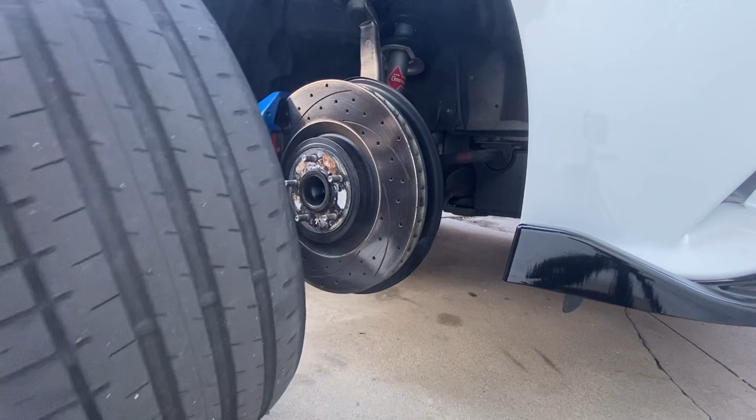What I'm going to show you right here is the inner tire wear that all Lexus have. People think that this is a problem, but it's not. It's the way the car is designed. As you can see right here, the tires are damaged. Not completely, but it's damaged already.

So I purchased these tires like a year and a half ago, and at the same time I purchased the FIGS Engineering bushing, and there is another brand they call RR Racing. So on both of them, they promise you that as soon as you install that product, it's gonna fix the inner tire wear. But this is the proof that it's not. They don't solve anything. So right now I'm gonna show you the FIGS Engineering.

So I installed those like a year and a half ago, and when you install this product, the handling, the feeling on the steering wheel when you're cornering, there is a big difference. It feels way better. It's really nice. I don't complain about that. But that they're gonna resolve the inner tire wear, that's false.

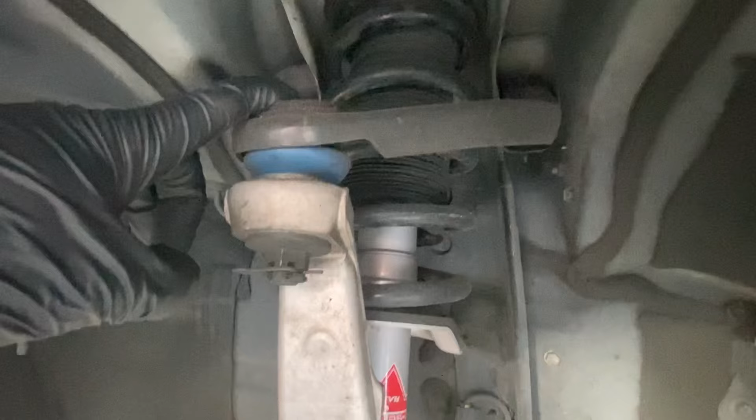So what you need to buy is the adjustable upper control arm to fix the problem. So that is the thing that I'm gonna show you right now, how to install it. Still you need to take the car to do alignment, but it's just the closer way to fix the problem so your tires can last longer. So we have negative camber, so we're gonna push it out a little bit, and I will show you right now how to do it.

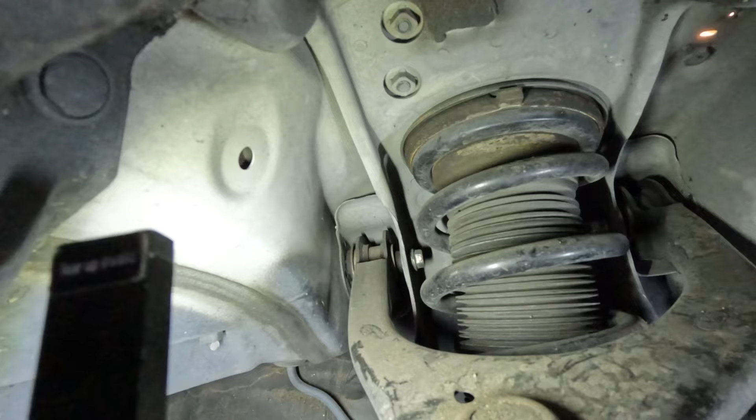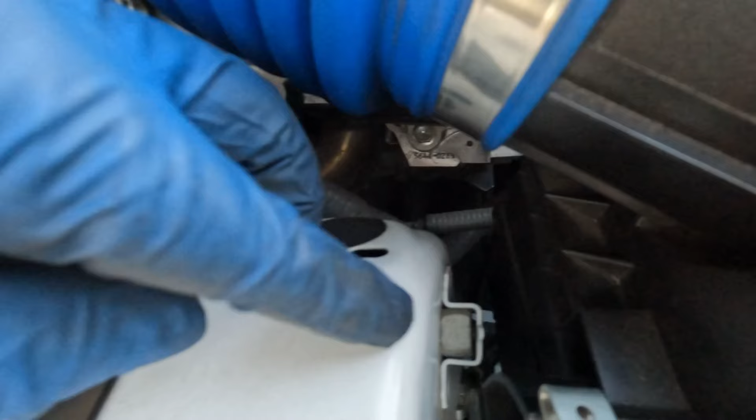So the first thing we're gonna do is remove this and the bolt. This is 17 millimeter, and inside over there is 14, but don't worry, because the other nut on the other side will be right here. So it's holding it right there, so you don't need to do anything. So now I'm gonna come back over here. I'm gonna work on this one right now. So I'm gonna remove this one. Again, 17. You can use an impact gun or whatever you have, but it's not that tight.

So now this one, we're gonna leave it that loose, and we're gonna hit it with a hammer right here. You can use something here to press, but since this one is still in good condition, from the video I did previously, I don't want to damage it. So what I'm going to do is just hit it right here.

Now that it's loose, you need to secure this part, because as soon as you remove this part, this one is completely gonna fall off. So just put a zip tie right here around the spring, just to make sure to hold it. We're gonna leave it there right now. Now we're gonna work on the ones inside. So for this one, you will need this kind of tool, a ratchet. It'll make things easier.

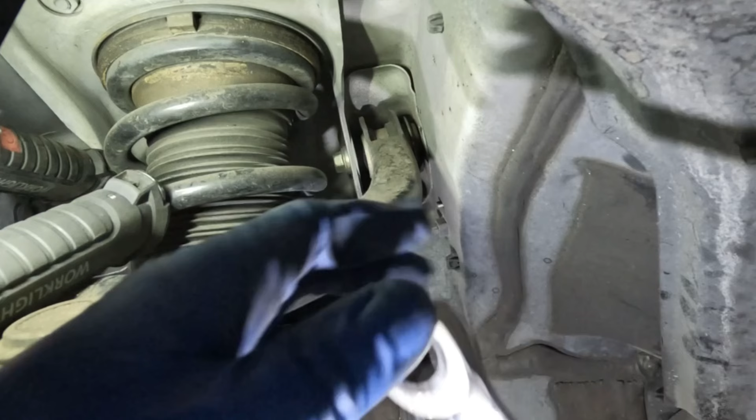You will see that it's loose, but now we go to the other side. I'm gonna leave it like that right now, so you can see I can take it off all the way already. It doesn't matter, but I just want some pressure on the other side. Breaking this loose. You will have to put it in from here. Okay. Now this one. Now we are here. Okay.

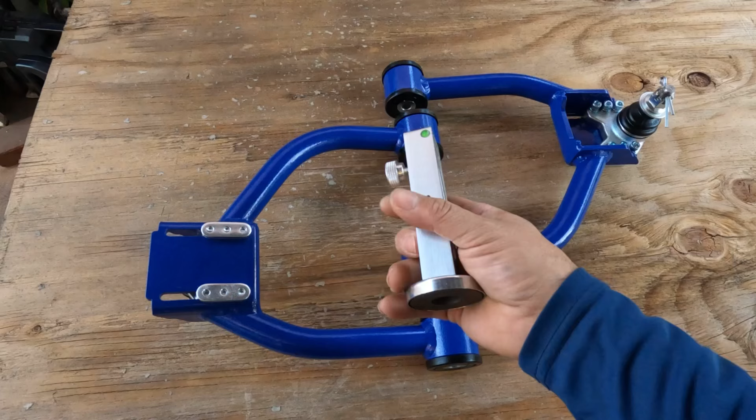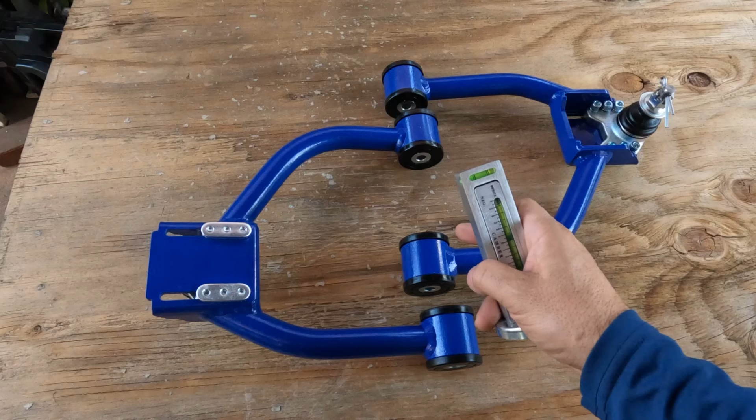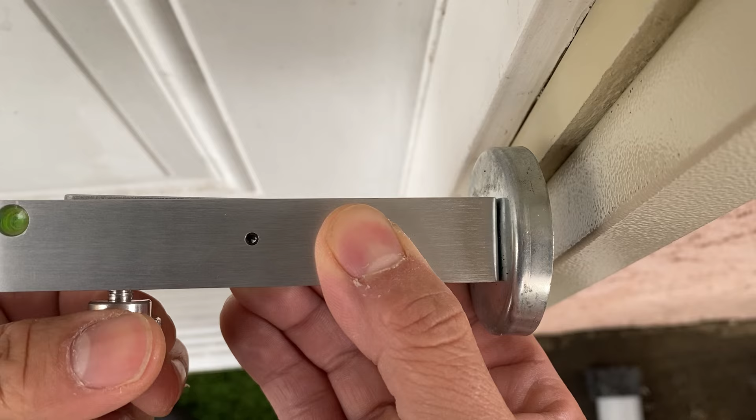This is the tool that you need to measure how many degrees you need to move the camber. So I'm gonna explain an easy way to use it right now, so we can proceed to adjust the camber. This is the tool that you need to know if you have positive or negative camber. It has a knob right here. You can see one side is gonna go up, and if I go to the other side it will be the other one.

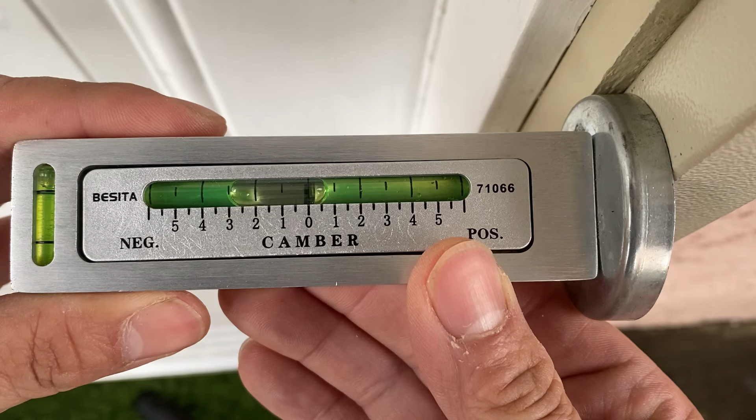So you need to find a flat surface like this one, and you need to leave it exactly on 0. This is something average. It won't be exact. Still, you need to take the car to alignment. So just make sure the bubble is between the 2 positive and the 2 negative. As soon as you have that, that's perfect. So you can start working on your car. So this one we will put on the rotor. Obviously it's a Lexus, so we have negative. So let's see how many degrees we have, and we're gonna work from that.

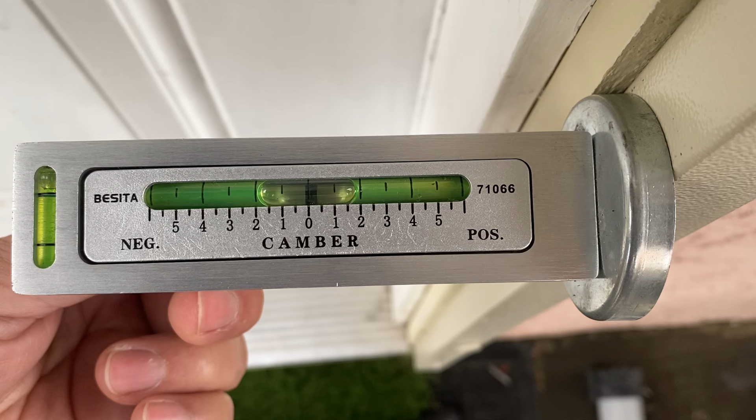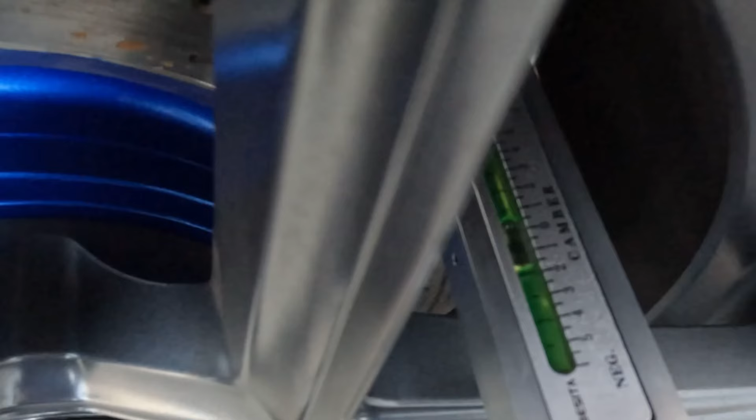So I'm gonna leave it right there, and that is fine. And let's go check the car now. So on the right side, I'm gonna try to see where the bubble is located. So right now it's showing me the edge of the bubble on the negative side is on the number 2, but we center the bubble on 0, so it will be 1. So we have 1 degree negative.

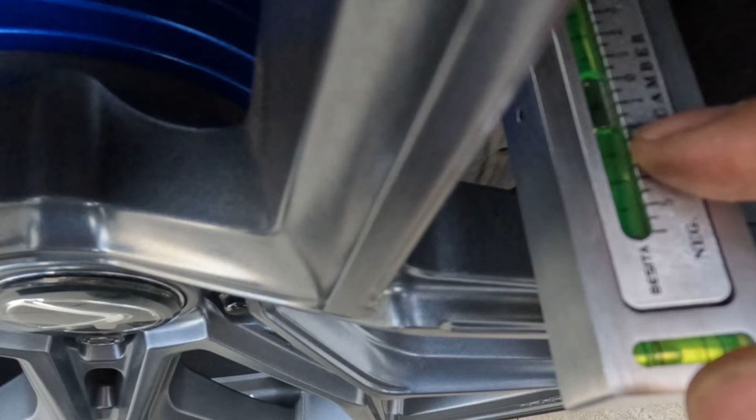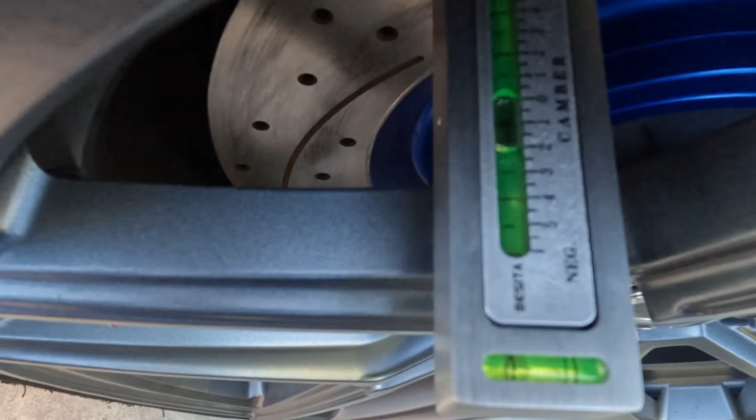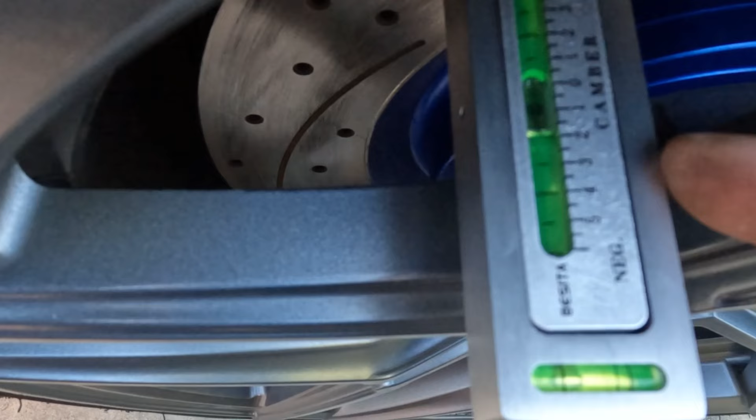So we're gonna try the other side, see how it is. So on the other side, it shows the same, the bubble is in the middle of the 1 negative degree. So with the adjustable control arm, we just need to move it 1 degree, and like that it will be, let's say, straight. So let's move to the adjustable control arms.

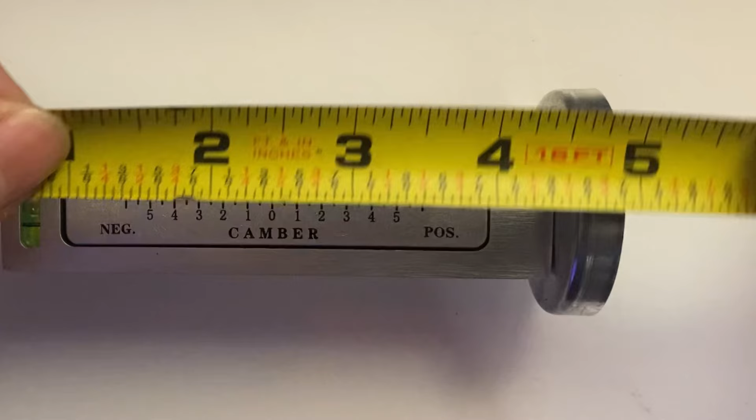So as we saw before, we have 1 negative degree, so we want it on 0 so our tires can be straight. So you need to push the ball joint 1 degree, but you cannot convert degrees to inches. So I just came up with this idea, and it's up to you how you do it, but I know it works because I took the car to alignment already. So that's what I did. From 1 to 0 is 3/16 of an inch.

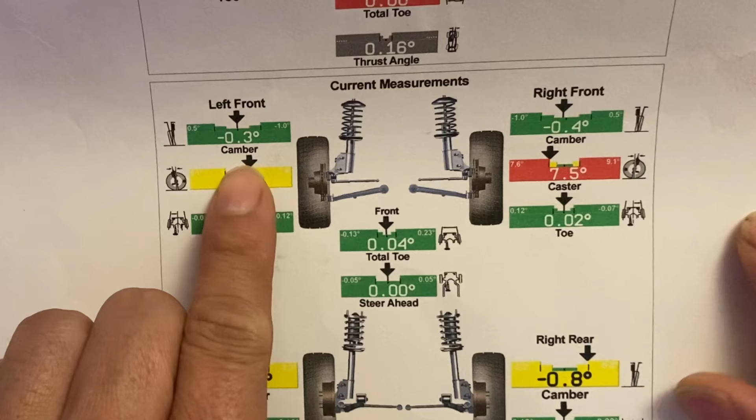So on the video I show a little piece of paper like this, because I'm gonna move the ball joint 3/16 of an inch. And then when you do that and you lock everything and install, I took it to the alignment, and that's what it shows now. So as you see, the camber is right in the middle.

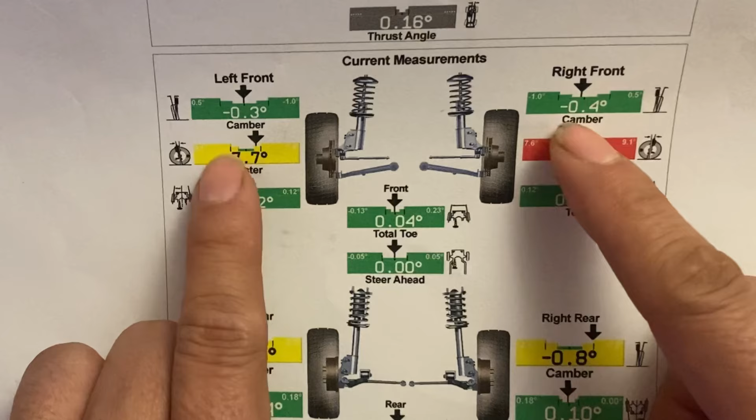It's never gonna be perfect. Whatever place you take it for alignment, it will never be like 0 0 0 0. It can be positive, it can be negative. As long as it's in between the range, it's fine. But you see, I did that and it worked perfect. I know degrees have nothing to do with inches, but that's what I did, and it works.

So when we're talking about camber, I just want to show you this. It's this one like this right here. So we have it like that. We have negative, we want it straight, and then we have positive.

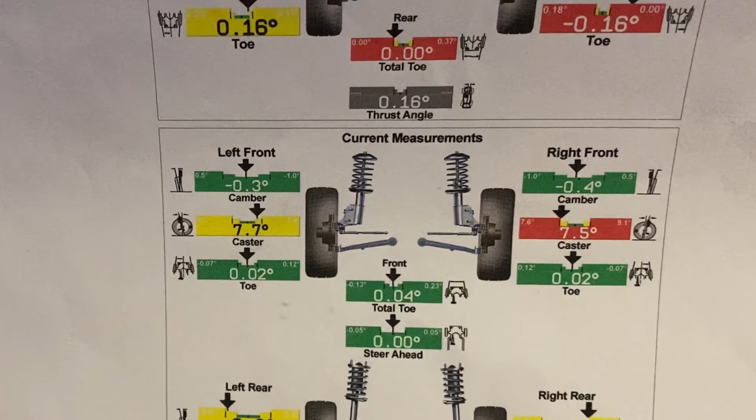Now over here we see caster. So caster, what I mean is the position of the shock. So we have it like this, but on this one it doesn't matter because the shock is not adjustable. On some cars they have it in the middle. It can be negative or it can be positive. We have a positive, but it doesn't matter because it's not adjustable.

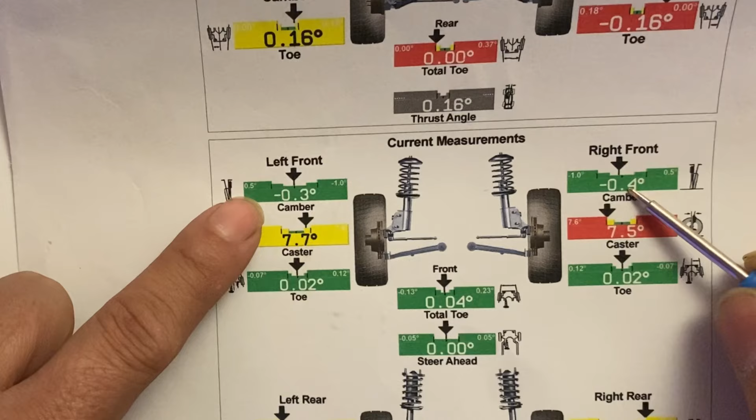And then when they are talking about toe, it's the way your tires are pointing. They can point in, they can point out. So of course those need to be straight. So as soon as I did that one, you see everything works. The caster doesn't matter, and you see this one is almost 0, so it's almost perfect. So if you want to follow what I did here, for sure it's gonna work on your car too.

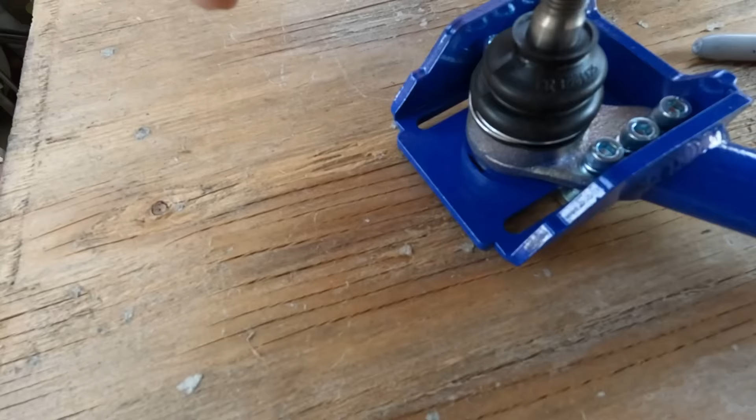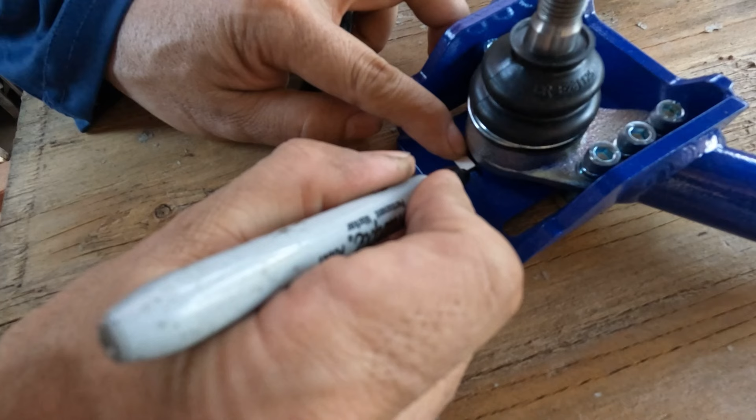You need to push the ball joint all the way here, so it will be the same distance as the factory one, and then we're gonna push it forward 3/16. Okay, as I showed you before, now I'm gonna use the 3/16 piece of paper. So I'm gonna locate it right on the end of the ball joint, and I'm gonna mark it right on the edge, where the piece of paper ends.

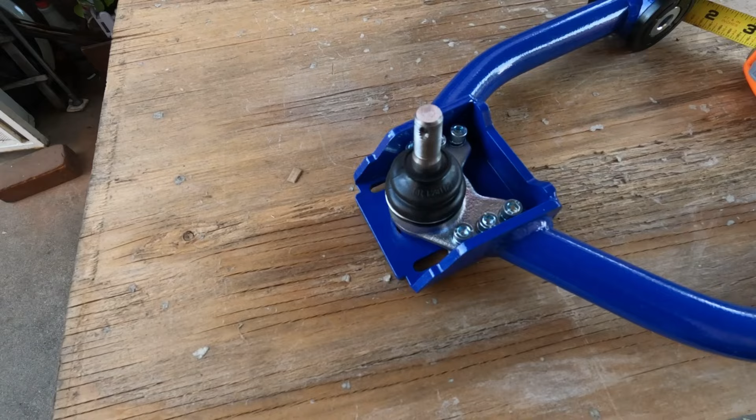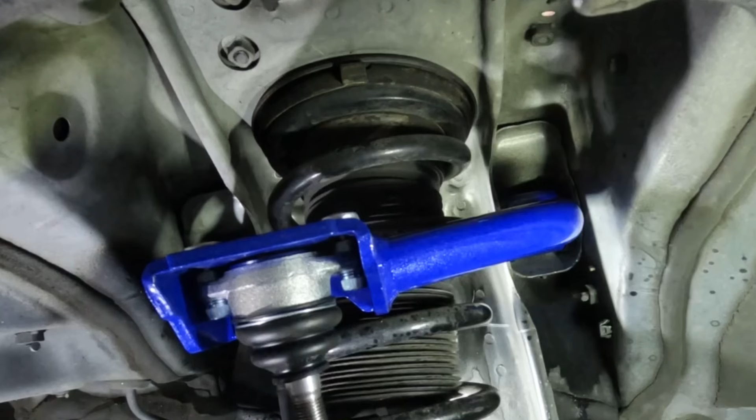Then I'm gonna push the ball joint forward to where the mark ends, because that is what I needed to make the tire straight. And now we're gonna tighten. Now that it's ready, just do it like this, and see, it goes perfect. See, and maybe there.

So now I'm gonna try this bolt. Now let's try the other bolt. Yes. If you lubricate, that's why it's so easy to move it around. If you don't do it, you're gonna get stuck. Now we tighten.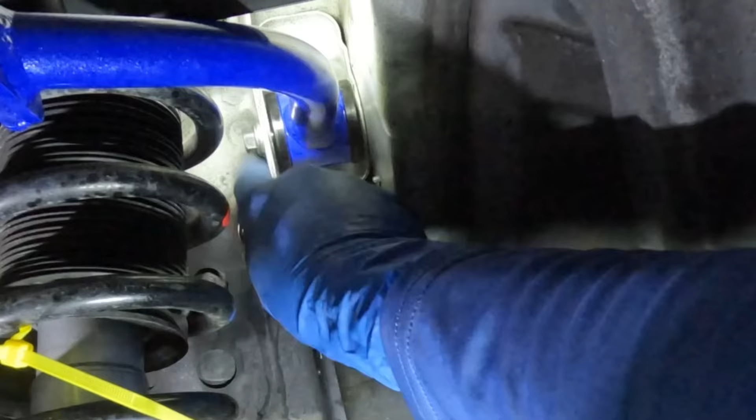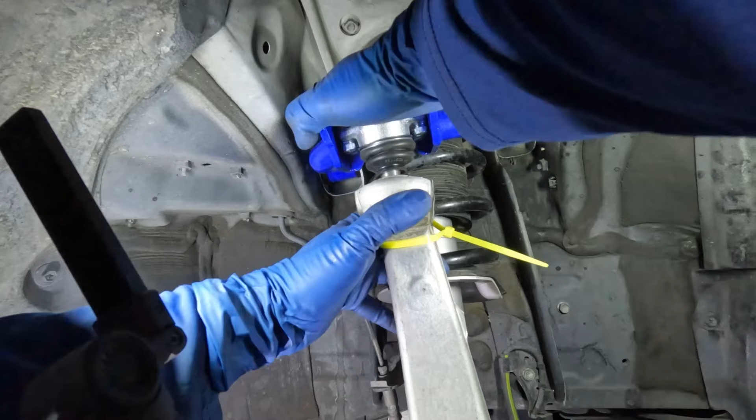Done. Now we're gonna move to this one. Okay, now this one over here. I'll pull this one out a little bit. No, more out. Let's see, like this. Yeah. Now that is there. It's cut.

Now I need to find the hole. Right there. The hole is right here on this side. Let's see. Yeah. Now just do the same on the other side, put the tires back and take the car to the alignment, to make sure everything is okay.